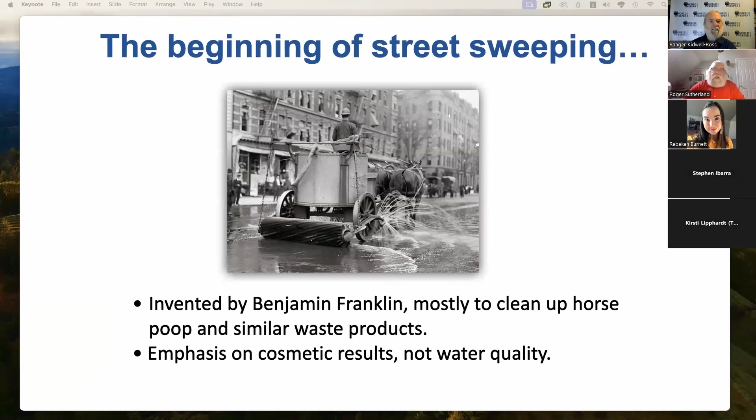But right now, let's talk about enhanced street sweeping. Like Ranger said, in the beginning, and if you look at this photograph, I think Chicago around the turn of the century, even though it was invented by Benjamin Franklin, street sweeping was really done to clean up horse poop and waste products. And the emphasis was never on water quality, it was simply on picking up horse poop.

So anyways, in the early 1980s, the U.S. EPA program dedicated $30 million to study all of the various types of best management practices that were being discussed, because this whole thing was in its infancy. The Clean Water Act had just been passed 8 years prior to that. So street sweeping was included in that list. In fact, there were 10 sites located in 4 states: North Carolina, Illinois, Washington, and Wisconsin.

And the way this worked, it was a paired basin analysis where they were sweeping one and weren't sweeping the other, and then they go out and sample the stormwater when it occurs with automatic samplers, and they end up with event mean concentrations for each of these different storms, and they compared swept to unswept. And those are the 5 pollutants they focused on.

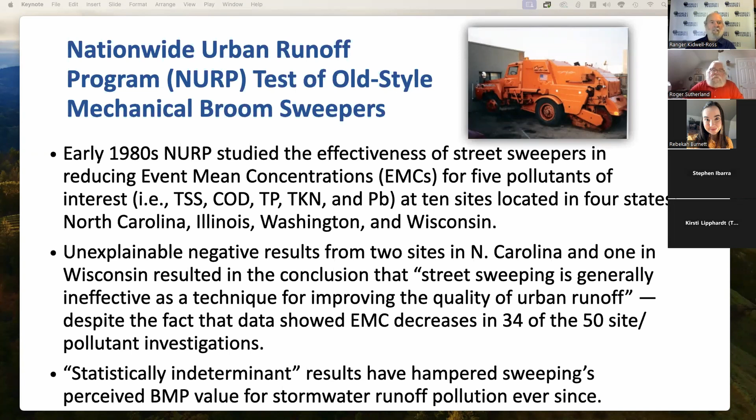But you know what? It was the unexplained negative results from 2 sites in North Carolina and 1 in Wisconsin that resulted in the conclusion, and I must read it to you because it was an albatross across street sweeping's neck for decades: street sweeping is generally ineffective as a technique for improving the quality of urban runoff. Now, they arrived at this conclusion despite the fact that the data clearly showed EMC decreases in 34 of the 50 site pollutant investigations. In fact, the whole thing of being statistically insignificant has been an albatross that's been plaguing the industry ever since. But you know, there's good news.

There's good news. And the good news is that today's mechanical street sweepers are much better than what they were many years ago.

And I got a silly thing going off here. All right, sorry about that.

And in fact, their pickup performance has doubled, if not tripled, from the machines that were being tested by the NURP. And in fact, I did test a couple air sweepers, but one mechanical sweeper in 2008 for the Elgin Sweeper Company in Elgin, Illinois. And we determined that this Elgin Eagle, which is the mechanical machine, but it did have a shrouded gutter broom for fugitive dust control, which I think helped immensely. We had a pickup efficiency as high as 86.4%.

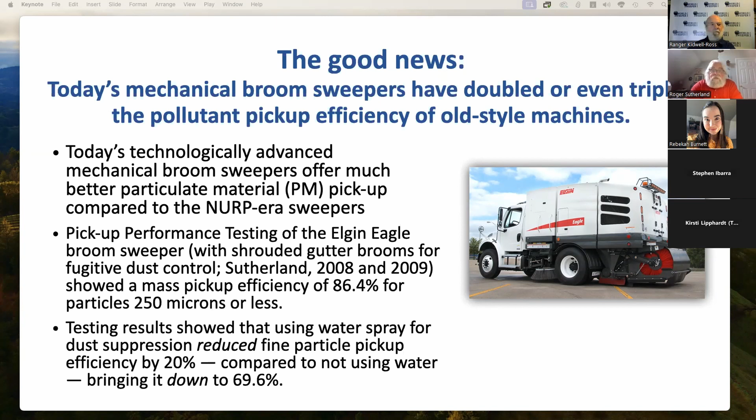But in that testing procedure, which will be discussed a little bit later, we also determined that if we use water spray for dust suppression, we reduce the fine pickup performance, and we're talking 250 microns or less, by 20%. So here's the issue. Why can't we figure out how to sweep dry and not wet?

But here, we've got even better news, because the modern air sweepers that are available, that were not available during the NURP testing, now have the ability to pick up pollutants and remove them from stormwater better than any other sweepers we've tested. In fact, the 250 micron, we talk about it because it's the most bioavailable mobile fraction, and we have actually documented pickup performances in single tests as much as 95% with regenerative air machines.

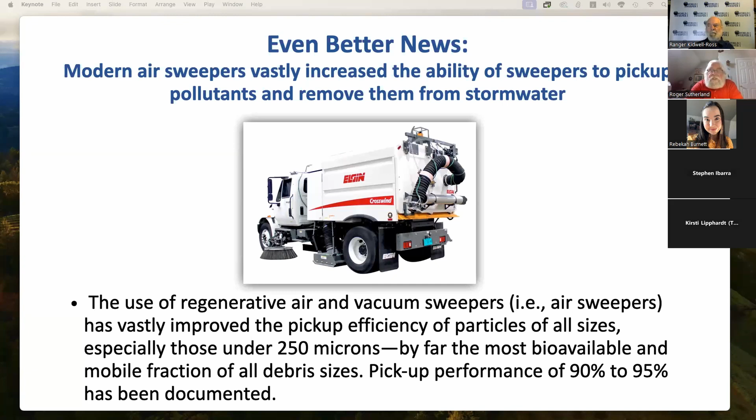So there have been a lot of studies done on street sweeping over the years, and that's been the difficulty because of the varying conclusions. And part of that problem is we didn't realize that, you know what? I heard a long time ago that no two snowflakes are the same. Well, I'm telling you, no two small urban catchments are the same. And it's the differences in these catchments that got in the way of the results of these studies.

But I want to focus on one that occurred in the city of San Diego, in Southern California. It was called the Targeted Aggressive Street Sweeping Pilot Study. They did it in 2010. And I was very impressed with it because they recognized the difficulty of paired basins and decided, okay, we're going to sweep one side of a street and not sweep the other side.

And when it rains, we're going to run out there with a beaker or whatever, and we're going to get the water as it flows from the gutter into the catch basin. We're not going to let it go down the pipe and try to catch it somewhere else. That's where we're going to do it. And lo and behold, they caught 3 storms. You see the data there.

What did they find? Total suspended solids reduced by 74% by a mechanical broom sweeper and 85% by a vacuum. Now, they didn't even test a regenerative air. If they had, I think they would have gotten even higher results, well into the 90s. But when you start looking at other pollutants, and they focused on metals, you can see that there is a disparity in the ability of the broom sweeper to reduce pollution versus the vacuum. And this would be an even greater disparity if they had tested a regenerative air.

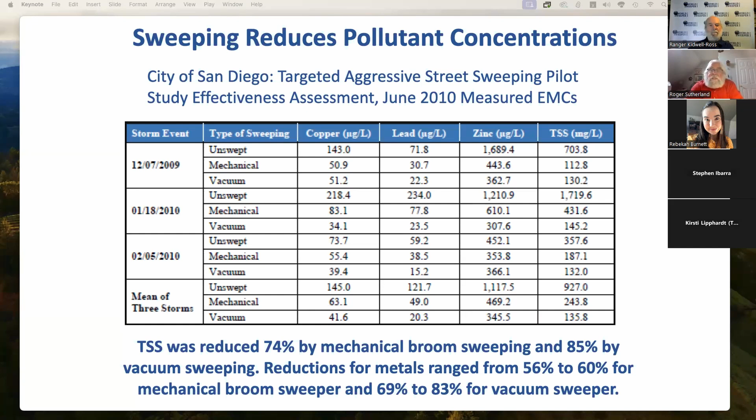So let's now talk about the study that changed everything. In 2019, John Sansalone with the University of Florida, in association with the Florida Stormwater Association and 12 to 14 MS4s throughout the state of Florida, published the results of their 12-year, $2+ million effort. And they concluded that street sweeping was by far the best BMP, up to almost 7 times more cost effective than the next BMP. And they focused on nitrogen and phosphorus recovery, which clearly are very difficult pollutants to address.

Now, the way the study worked is they went out and measured the amount of material being captured by the range of available BMPs, from sweeping, catch basin cleaning, and then a variety of structural end-of-pipe measures. And then they costed what it was to capture a pound of nitrogen or a pound of phosphorus for each of the recovery methods. Sweeping was the lowest cost per pound. Catch basin cleaning was second in all instances.

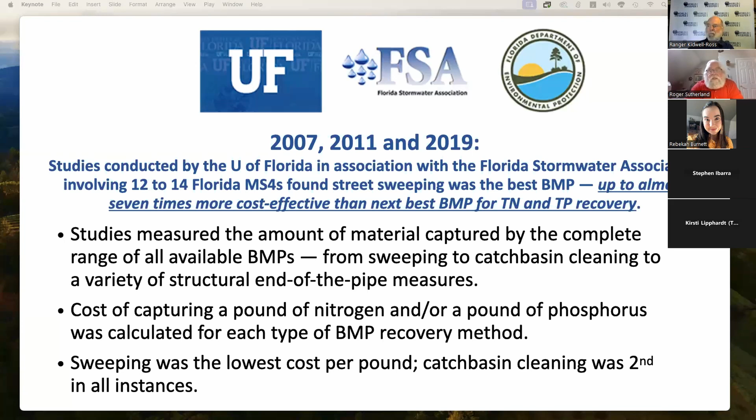And then that's the median of all of the best management, the structural gadgets and widgets that we put into the system to try to remove pollutants and solids. And you can see that that's even twice catch basin cleaning.

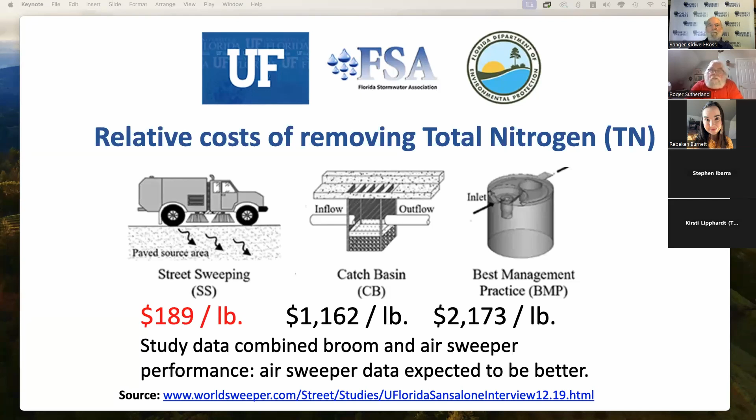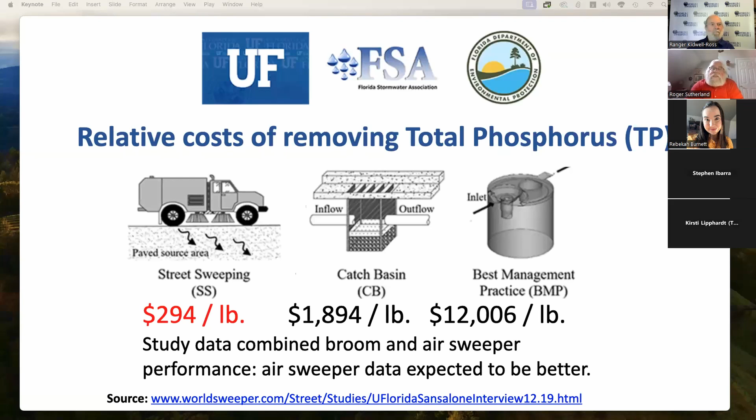And what's really interesting is, if we go to the next slide, that is, particle recovery of particulate material matters. And this is John's words, by the way, John Sansalone, proving that street dirt pickup recovery also matters. In fact, the Florida studies found that street sweeping was the most economical and dominant practice that MS4s could implement and optimize in order to maximize nutrient and particulate material recovery benefits. And folks, if they had studied metals, if they had studied toxics, any other pollutant, but maybe bacteria, they would have arrived at the same results.

And what's really interesting is that here they are doing this study using street sweepers, and yet they, like so many people in the country and people in stormwater, know so little about street sweeping that they didn't know they should have separated the broom and the air sweeper data. And I believe if they did that, we would see even more dramatic results, and that the air sweepers would be even cheaper to remove a pound of phosphorus or nitrogen.

But here's the most important thing. This statement changes everything. The study showed conclusively that we had a reduction of, okay, we switched the slides, but it was statistically defensible at 95% confidence level when they combine all 14 MS4s for particulate material, total nitrogen, total phosphorus. That is the conclusion that I expected that we would eventually hear. And I'm glad I'm still alive to hear it.

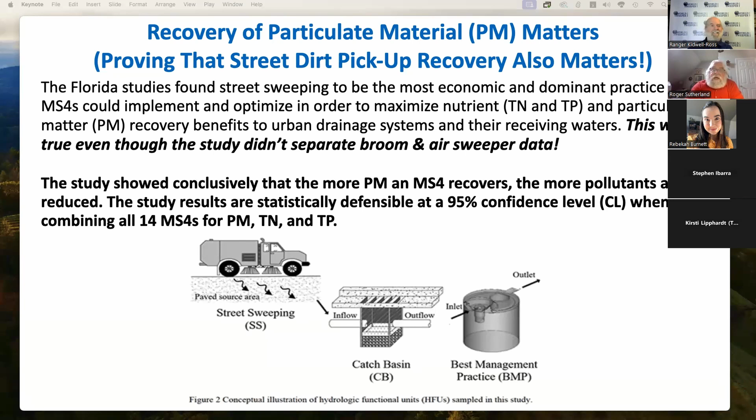So let's now talk about what it is that we want to talk about here today. Okay, so if you want to maximize the environmental value of a street sweeping effort, create an enhanced sweeping program. What is an enhanced sweeping program? It's a program specifically designed to focus on the maximum reduction of pollutants and microplastics traditionally found in stormwater runoff. We're talking particulate material, suspended solids, and all the contaminants associated with it. By the way, both of those things can actually have a very negative effect on urban air quality.

So the ability of a street sweeper to pick up accumulated dirt and contaminants, which we call street dirt, is affected by a number of things. And we're going to touch on each one of these, because if you want an enhanced sweeping program, you need to understand sweeping interaction and how it interacts with the accumulation and wash off of street dirt, which was identified in 1972 by Sartor and Boyd as the primary source of pollution in stormwater in the urban environment.

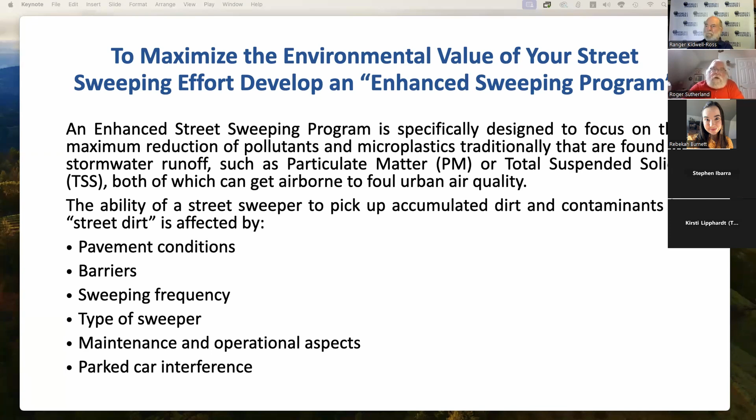So let's talk about pavement conditions, and also barriers. Condition and barriers. Okay. It's pretty clear that street sweepers have difficulty in picking up dirt on pavement classified as poor or fair. This is due to cracks and deep depressions where the dirt can accumulate and basically hide. Uneven surfaces make it difficult, especially for the newer air machines that use air and not brooms to pick up material, so regenerative or vacuum.

So here's the thing. If you have an enhanced street sweeping program, you would support every opportunity to repave streets and bring those streets from poor to good. In fact, if streets were all at good pavement condition, the water quality improvement would be significant. I've said this for decades. I wish someone would hear this in the pavement industry and would say, okay, let's prove it. And we would prove it.

Therefore, understand that street dirt accumulates within just a few feet of curbs or barriers. So if you have an expensive operation, and these are expensive operations with expensive equipment, don't sweep uncurbed streets. That makes no sense. That's a poor allocation of your resource. So do not regularly sweep uncurbed streets. Instead, occasionally sweep them, especially after a storm event where maybe a lot of debris and materials come down.

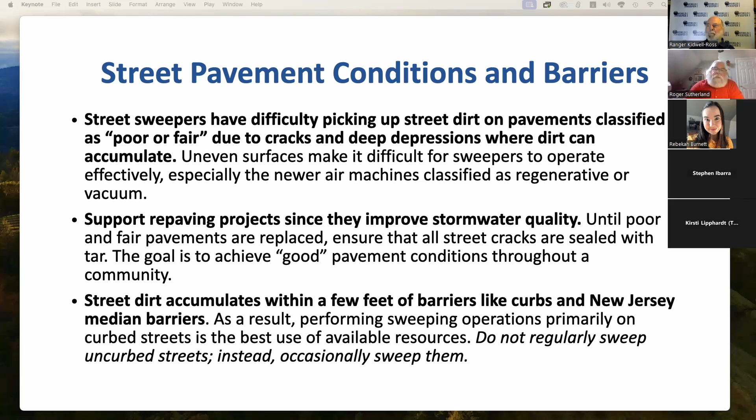So let's talk about the next item on the list, which is sweeper type. This is very, very important.

I've been talking about mechanical brooms and all these air machines, but broom sweepers employ a main broom that tosses debris into a conveyor belt. Don't confuse the main broom with the gutter brooms found on all street sweepers.

Mechanical broom usage should be limited to highways where there's no curbs, but there's accumulation, as well as conditions under heavier than normal accumulation - in other words, following large storms and during spring cleanup. Mechanical broom sweepers need to go away. They're not the solution for improving the quality of stormwater.

Vacuum sweepers are excellent, especially for porous pavements. Don't use a regenerative air machine - use a vacuum sweeper if you have those kinds of pavements. But understand vacuums continually exhaust used air, so that can have a negative air quality impact. Regenerative air machines are recommended for an enhanced sweeping program. Unlike vacuum machines, a regenerative air machine constantly recirculates or regenerates its air supply.

Just for fun, I've thrown a fourth one out there. This one doesn't exist - believe me, there's been a few attempts at it and they haven't gone well, but they demonstrate that it can be done. So it's a matter of time. What I'm calling high efficiency sweepers, or HES. What is a HES? It's a high efficiency sweeper, one that can pick up a very high percentage of the fine contaminants, but also employs a fugitive dust control mechanism, and has low maintenance costs, which has been the difficulty so far.

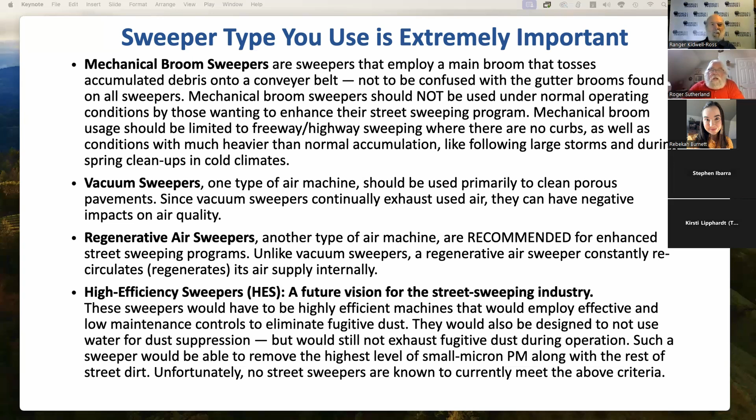Let's move on and talk a little bit about other things that are important. I want to make sure I get this done in a reasonable time frame.

Maintenance of equipment - this is a no-brainer, but it's amazing how many operations throughout the country say, 'Oh God, those gutter brooms are so expensive, can't we go another month or so with them?' That's the number one problem. You've got to replace worn gutter brooms. They're very important in the process, whether it's a mechanical or an air machine.

You've got to maintain the vehicle, make sure the oil is changed and the moving parts are functional. There's something called a tandem operation that I studied back in the early 90s at the City of Portland, in which we had a mechanical sweeper followed immediately by an air machine. They had one of the first regenerative airs available - TYMCO, of course, created that technology - and we saw dramatically better results.

In certain circumstances, this might be the way to go, especially if you're trying to respond to a dry toxic spill. The other thing that's really important to know about is the forward speed of the sweeper.

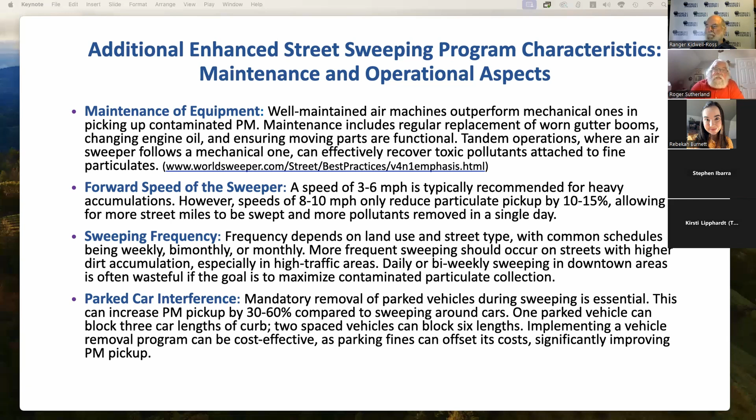So let's talk a little bit about some of the techniques that are available to identify what's going on in your communities in terms of street dirt accumulation.

Basically the process is the same: you use a shop vac with a stainless steel drum because you don't want to contaminate the material you're picking up, and metals are really important for you to analyze. You got a portable electric generator, and you can suck up all the accumulated street dirt on any given place you want to go. When we get this data, we can understand the relationship between this accumulation and things like land use, street traffic volume - which is extremely important - and street pavement conditions. The rougher the street, the higher the accumulation, and the more difficult it is for the sweeper to sweep it. So by the way, when you get those fair streets, make sure you tar all the cracks. That should be your go-to thing at some point before you can get it repaved.

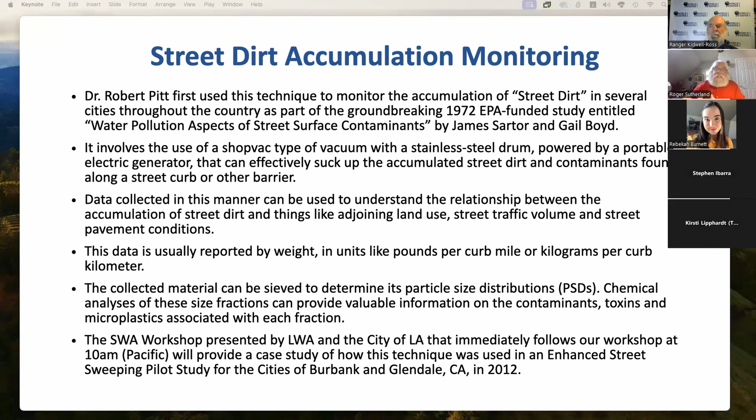Now the next thing we need to talk about is in situ, or street sweeper pickup performance monitoring. Now this is not testing - that's next. This is performance monitoring. What that does is essentially you go out there and collect street dirt, but time it so that you sample a street that is not swept, then a street sweeper comes along, and then you sample it - not in the same place, but one that is. By doing that, you can get a handle on what effect your existing operation is having on the street dirt itself. This has been done, and I've listed the studies.

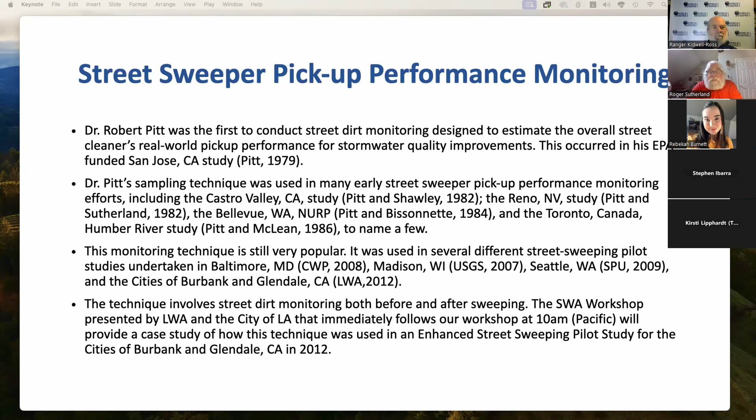What they're going to talk about next is an enhanced sweeping pilot, one of two case studies they did for the cities of Burbank and Glendale, California. I was a sub to them, and it was a very fun effort.

Now let's talk about the one that probably matters the most: controlled street sweeper pickup performance testing. We want to use a precise approach. We want to establish a curb test area, usually about 50 feet, which is what I've used and what others have used as well. We know the length and we know the initial loading.

How do we know the initial loading? Because we created a silica-based simulant whose particle size distribution closely matches that of the local jurisdiction we're testing in. We put a certain amount of this material down with a fertilizer spreader within a couple of feet of the curb, and then we have a timed sweeping operation with a stopwatch.

We decide whether to use water or not, how fast we should go, and maybe we look at different pavement types. But for the testing of new sweepers, let's cut them a break and give them good pavement, because that's really what they're designed for. Following that pass, we immediately vacuum the entire area, and we now have a before and an after.

I developed this test in the mid-1990s. I've conducted it 6 or 7 times in at least 5 cities in this country and internationally in Tel Aviv, Israel. So we can determine how effective that sweeper, that model, and that circumstance is in picking up all the different ranges of particle sizes it encounters.

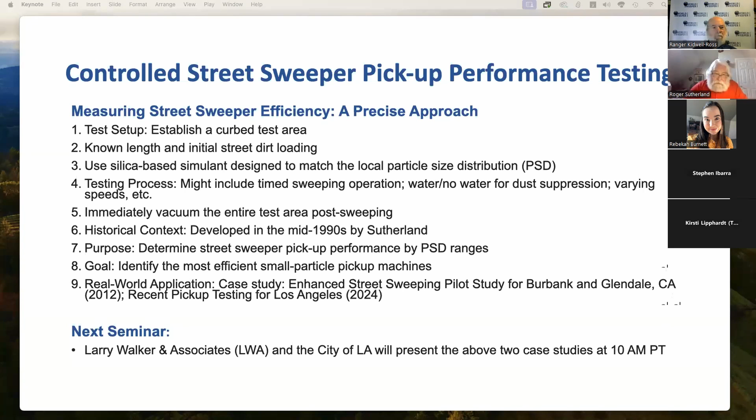Why do we want to do this? Obviously, we want to identify those that are most effective in picking up the small particles. There's a recent effort done in the city of Los Angeles. That'll be covered in the next hour by John Ball of the city of Los Angeles, along with Larry Walker and Associates. So moving on, let's summarize.

What are the plus and minus aspects of sweeping? Here's the disadvantages: the cost of the sweeper is expensive, $300,000 a machine. Maintaining these is expensive, gutter brooms aren't cheap. There's resistance from citizens about having to remove their vehicle again—every two weeks I've got to move the vehicle. And basically we can't operate during rain, which we shouldn't anyway, but in freezing weather we can't operate because we're using water for dust suppression and it freezes.

Why, when it really comes down to it, does street sweeping far outweigh any other BMP we can do? We have no real estate, no property ownership—it's public property. We have no infrastructure to develop or maintain, and we don't have to go out and clean structures and maintain those. Sweeping is the most cost effective, and it costs the least.

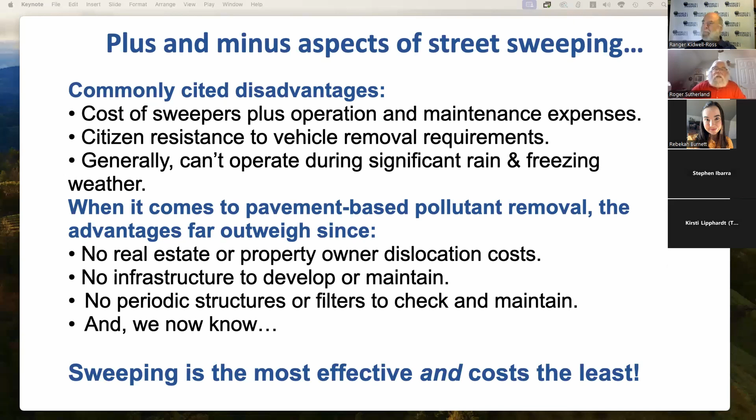That pretty much ends my presentation. I want to talk a little bit about who's going to follow me. Well, okay, there's a couple of things here—I forgot this slide, you can read through them.

I've created a computer model. Most people don't want to use it—I don't think they want to know the answers they'd get. But the fact of the matter is we can model this, and we have modeled this. Here's a good tip:

Take the sweeping program out of streets and give it to the stormwater people—they'll be able to manage it much more effectively with water quality in mind. And keep in mind, broom sweepers are not as efficient at small-micron pickup. They're better than they've ever been, but still not as good as an air machine. Vacuum sweepers are a good choice, but only for really porous pavements. Regenerative air is the best for general street sweeping. So keep those items in mind.

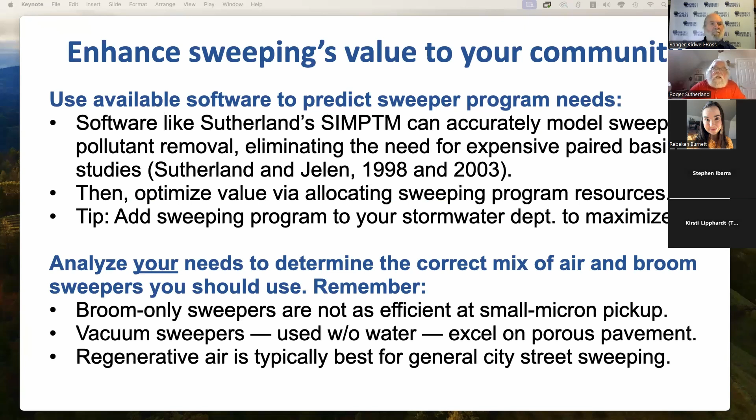Now I want to talk to you a little bit about my colleague, Ranger Kidwell-Ross, who's also going to speak in this presentation, on moving your street sweeping program out of the past and into a cost-effective future of increased value. This is what he's going to talk about.

Ranger is the founder and editor of worldsweeper.com, as he mentioned before. He's the most prolific writer and researcher on the topic of power sweeping. I hope I'm the second most prolific, but I don't think I'm even close to the articles that Ranger has researched and written on this topic.

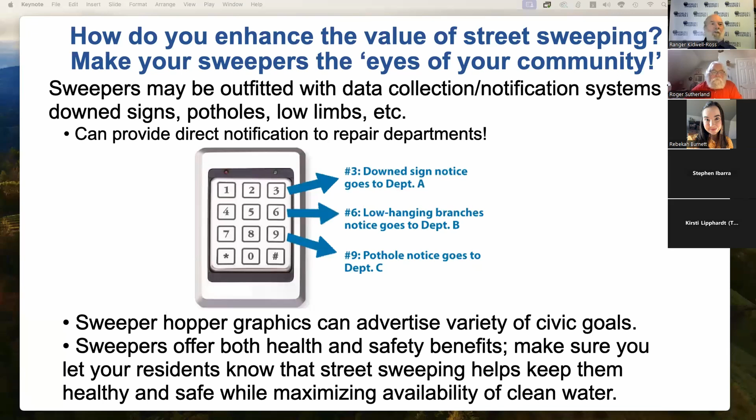And really educate your residents, as that last bullet talks about. Let them know about the value of sweeping. Yes, for them, they have to move their cars. And as Roger said, it's very important that they move their cars, because we lose so much when cars aren't moved, and often the same cars are not moved sweep after sweep, so you can really get into some health issues there. But make sure your residents know how much value sweeping brings them, and the more you educate them, the less citizen friction you'll have.

Educate them about the pollutant removal value of sweeping. You can do that at touch-a-truck events, which a lot of municipalities now do once or twice a year. They bring in a variety of equipment used in the city and let kids crawl all over them, and also hand out materials to teach them. I encourage you to develop educational modules that go into the schools. Fifth grade is a great time to start, bringing home to kids the environmental value of sweeping. Naming contests are all over the place these days, and kids especially bring really fun entries—'Sir Sweeps-a-Lot', and there are some great ones out there.

So let's talk about this a little more, because it's so important: the one-vehicle-equals-three-car-lengths problem. With the sweeper, you have to pull out a car length before a parked car, and you can't get in faster than a car length after the parked car. If you have multiple parked cars in a block, that street is basically going to stay unswept. And the longer that happens, it not only looks bad, it can be a safety issue depending on what's accumulating, and certainly a health issue, when the same areas of streets haven't been swept week after week—you can get rodent problems and so forth. So it's so important to move vehicles.

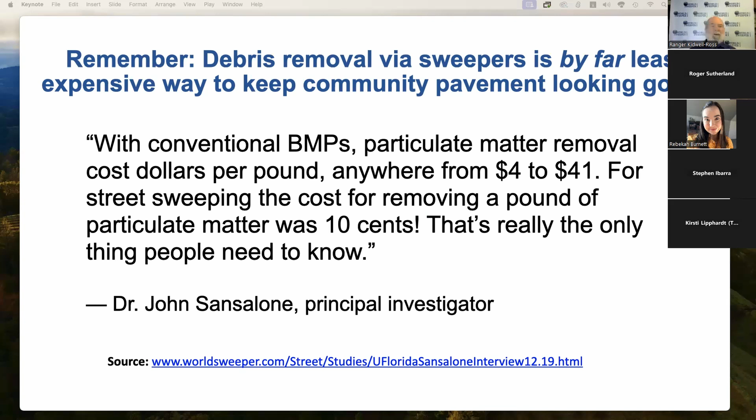Now let's talk about how you can develop a citizen-friendly car removal program. We have technological advances that have allowed that to occur. You can develop an internet app that uses the GPS program already used by most every street sweeping program in the country to keep track of your sweepers, and link that to your GIS system. Use an app to provide alerts to whoever owns a vehicle that lives on that street sweeping route.

You want them to be able to have pull-down menus to choose what they'd like to know about the sweeping that's coming up, let's say tomorrow. For example, they might want a notice the day before sweeping, and they might want their next notice to be when the sweeper is a mile away. That allows them, if they're home, to bundle the kids in the car and go shopping, or even wait and drive around the block and repark.

Why can they do that? Well, they can do that because you are clever enough and technological enough to put a camera on your sweeper. That's another way to lower the cost of sweeping, because you can eliminate ticketing by your parking enforcement folks.

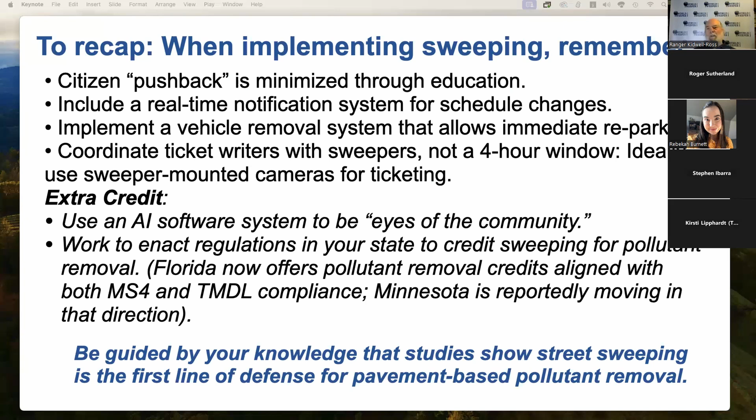So what is really spurring this is that we need a sweeper test now that is designed to let buyers know what sweepers best suit their needs. As you see, the top set of logos, this recent LA study that you're going to learn more about in the next seminar, showed a pickup capacity for a broom sweeper, which happened to be an Elgin Broom Bear, of only 35% of this basically smaller simulant that was put down on the roads. You can learn all about that in the next seminar. But the air sweeper picked up 75%. I wrote about this last month in my monthly newsletter, which I encourage everyone to sign up for. You'll find at the end of our presentation how to do that. And that was very important.

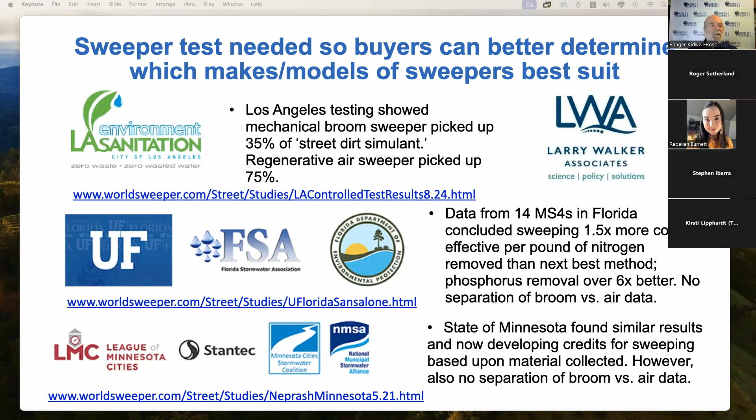The only test that's currently out there was a decade or so ago, and it was the South Coast Air Quality Management District. They were more interested in air quality than stormwater runoff. They had it be pass-fail. So every sweeper that's ever been tested, the manufacturers did things like put extra nozzles into the sweeper hoppers and so forth for dust suppression, and passed the test. So now there's no way for new sweepers to be tested, and we want to make that happen. And we know now that all current sweepers are using water for dust suppression. We also know that we're losing 20% of small micron debris when that happens. We hope the manufacturers can come up with something there.

And I asked AI to tell me how many gallons of water it thought were polluted by sweepers every day. And the answer was 3 million gallons. They take perfectly good drinking water, put it into the sweeper tank, spray it out as the sweeper sweeps along the street, suck it back in, and then trundle it off to the dump site as polluted water. And because they're doing that, we don't get as much small micron debris. We hope we can change that.